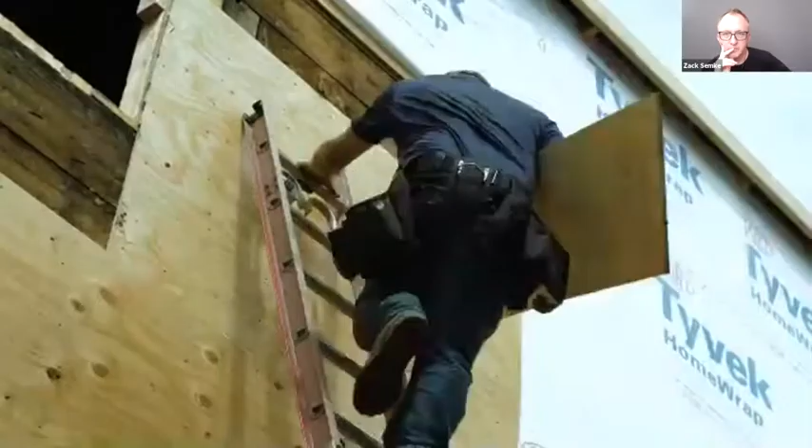HPZS is a woman-owned architecture firm in the city of Chicago that's focused on preserving a sustainable future through three things: historic preservation, sustainable design, and affordable housing. It's really at the nexus of these three things that placed us in a very unique space to meet the challenges of a project like this. The Yannell Passive House is on track to become the first renovated PHIUS project in the state. It's not just a new construction house. It's a house that was there when the community started, but today it's being built for the future. For us, a project like this makes perfect sense. Let's take an existing building and let's retool it for the future.

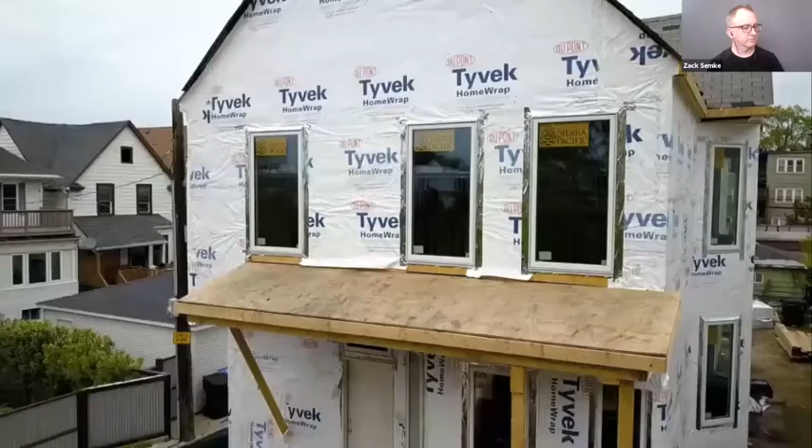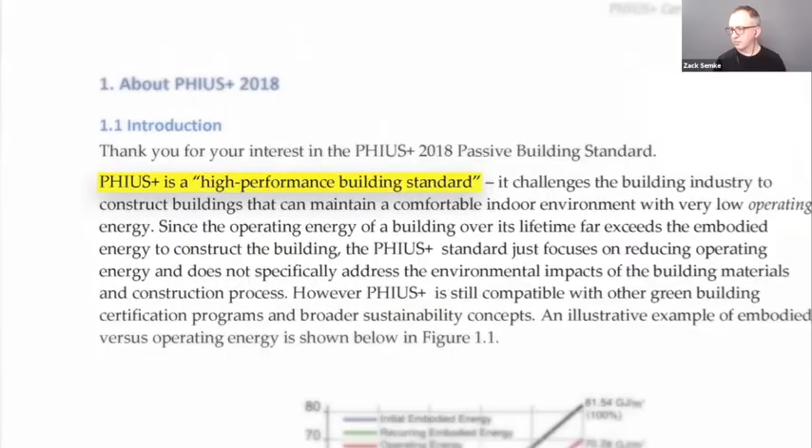What's different about the Yannell house is that it's pursuing the Passive House certification. A passive house is a highly insulated and airtight building. There are lots of homes that have some green or sustainable features, but this home has an entire suite of those features that makes it meet the very rigorous criteria associated with PHIUS certification. PHIUS has a strict set of requirements that need to be met not only during the design process, but also tracked through the construction process, tested and verified to an extreme precision.

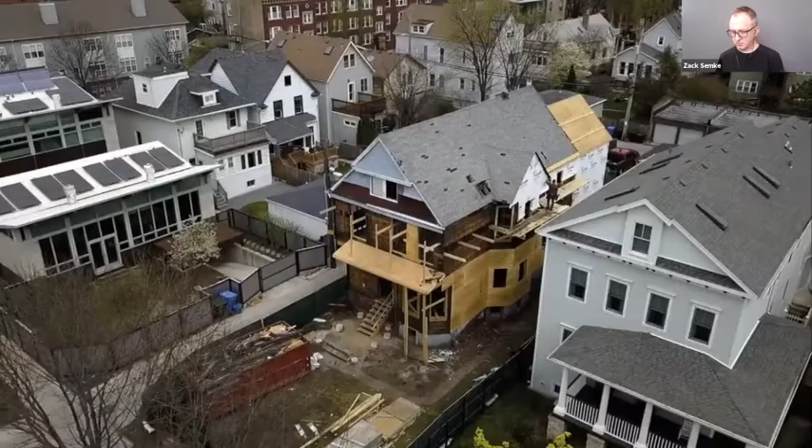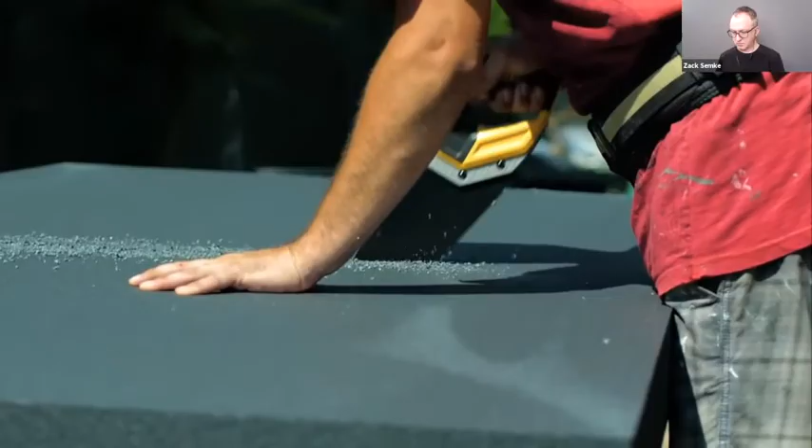The main design challenge was determining how to create a high-performance building while maintaining the existing structure of the house. When you're dealing with an existing house, you have set conditions that you can't change like you would in new construction. This was ultimately solved by overlapping certain areas of the house in insulation and by utilizing a new technology called AeroBarrier to help seal the entire house.

Yannell is efficient because it prioritizes the envelope of the building above everything else. This helps the house retain heat in the winter while keeping it cool in the summer. Additionally, with the Yannell house, the mechanical systems were specifically selected for high performance. So when the house does need to use active heating and cooling, it's doing so in the most energy efficient way. And the electric use of the house is offset by the introduction of solar panels on the roof.

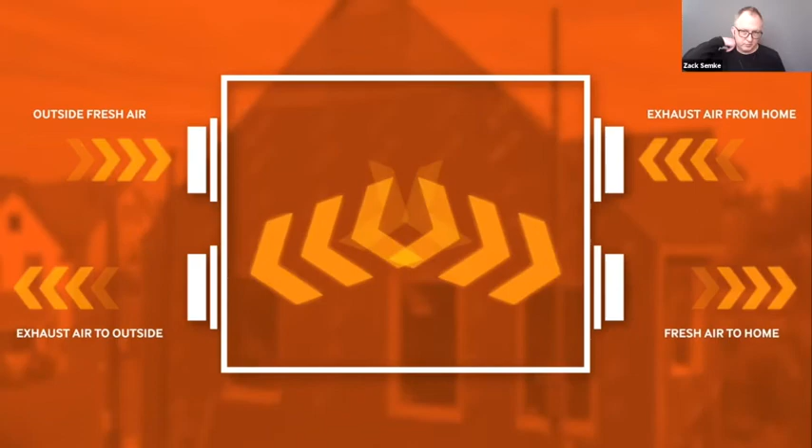In addition to heating and cooling, Yannell uses an ERV that brings in fresh outdoor air while continuously exhausting stale, stagnant air from inside. This creates the most healthy indoor environment possible.

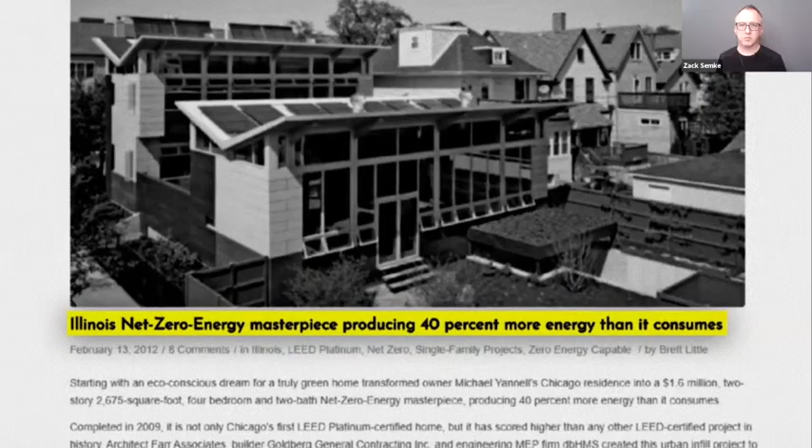A really important thing about this project is that it's a passion project of the owner. I've always wanted to push boundaries with green buildings. My home, which is right across the alley, is a LEED Platinum Net Zero Energy home, and I wanted to try a different route with this house, and the Passive House certification seemed to make sense with some of the things that I had learned from the 10 years that I've lived in my house, so it was a perfect fit.

This project is the first of its kind in Chicago because it's the only development-driven PHIUS renovation that's intended to be sold in the open market. Buyers don't have to compromise. This property offers the highest levels of luxury and comfort without needing to sacrifice anything for the sustainability that it offers as well. It has everything. It's designed with style, efficiency, and performance in mind.

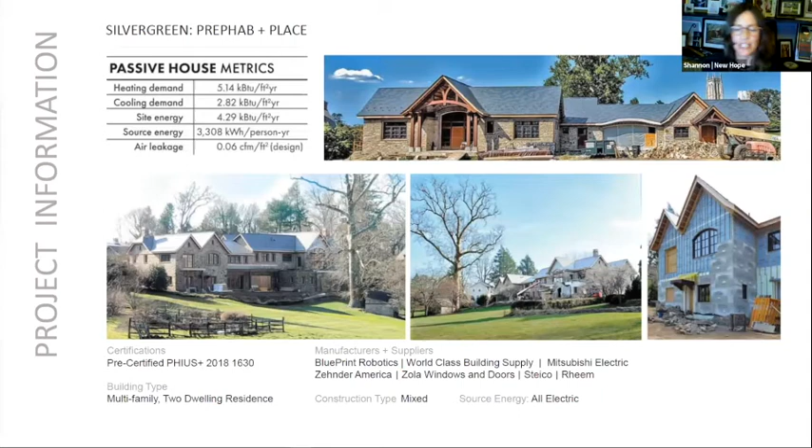So Silver Green is an all-electric, carbon smart, vapor open, custom site built and prefabricated PHIUS+ 2018 pre-certified multifamily passive house. It's a mouthful. And it's made with predominantly natural materials. It's in a town called Bryn Athyn, PA, outside of Philadelphia, between Philly and Trenton. And we set our priorities for two sustainable homes to rent affordably to families now and renovate easily in 20 years for aging in place.

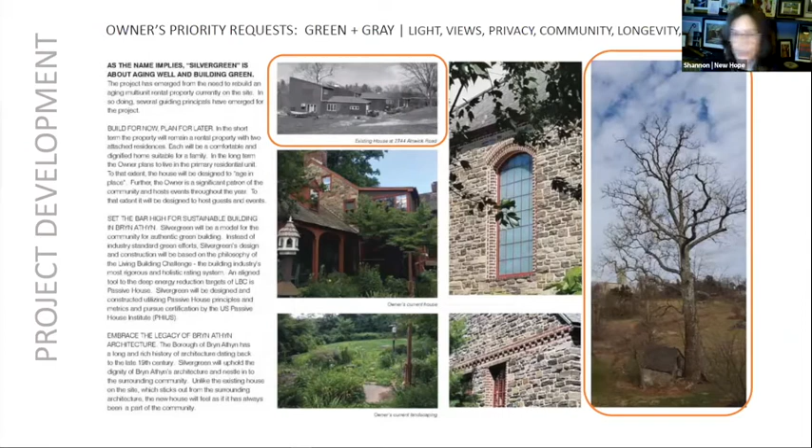So the architecture needs to fit in with the community and the historic district and have a big space for family gatherings, future accessible space for community events and fundraisers. And I advanced a little too quickly. Up there in the orange box is what we inherited. It's the existing building that was on site, a sentimental rental, formerly known as the Bishop King House. And on the right in orange is our oldest living residence, the natural spring, the spring house, the wetland, and a 300-year-old buttonwood tree, including the view, which is spectacular.

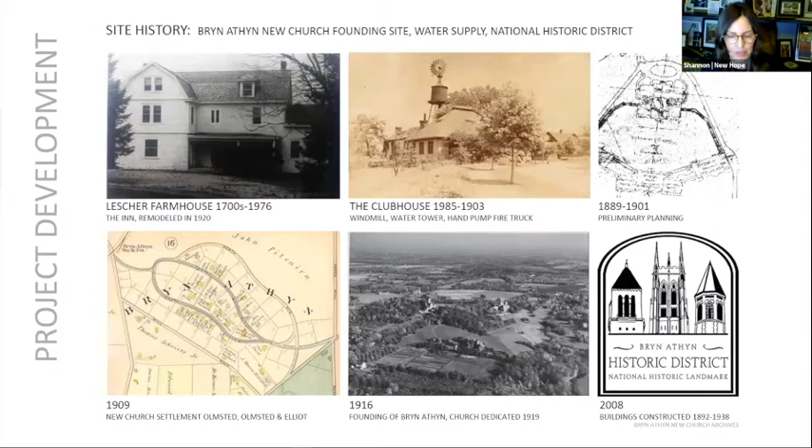And the history of the site where Bryn Athyn was founded is where our site is located. And so we also inherited four foundation stones from the windmill that you see in the top center that fueled the original water supply. And we are at the top of our watershed. So the first thing we did, step two, after we dug the history and got set up with the team, is we compared green building ratings and we selected passive house certification as our goal and living building as our guide, because we wanted to get the metrics right and have the most efficient, easily buildable, code compliant certification. And we also wanted to have natural materials, equity, and a lot of site features that passive house is still ramping up and getting into their certification.

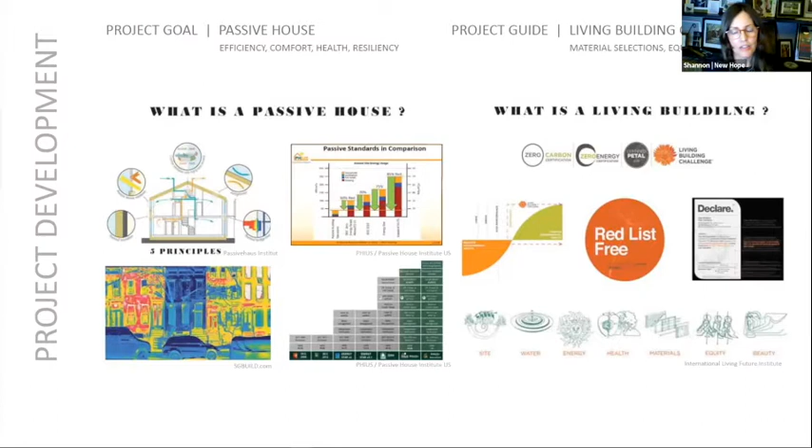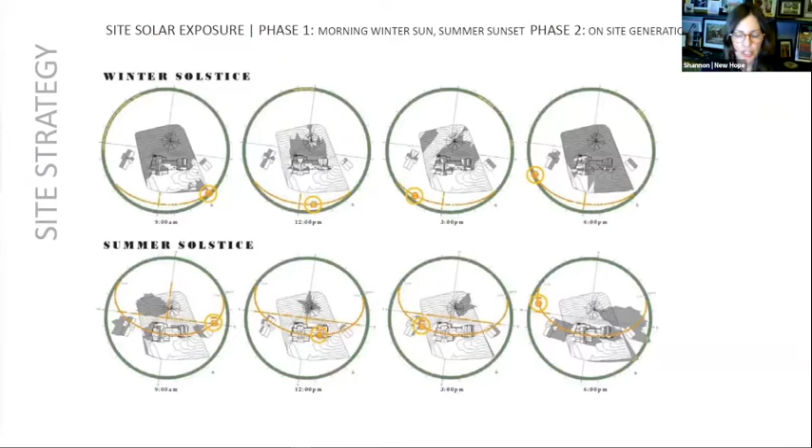So we drew up a series of legacy planning strategies for the site based on the owner's priorities and designed for all seasons to get winter and summer sun and future power generation on site. And we also designed for all phases of construction and infiltration of the water. This is a Think Green landscaping drawing, which is just brilliant and incorporates the windmill foundation stones into the landscape architecture.

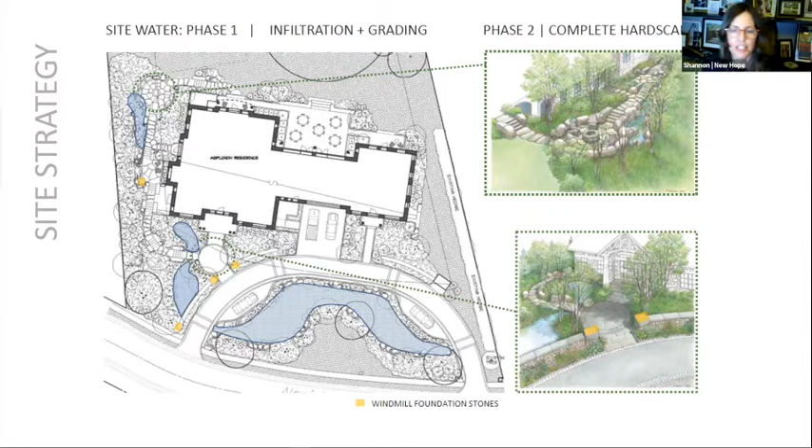And our goal was to really secure the exterior character for the building, so that would never have to be changed and that it would be classic and fit in. And the passive house envelope with the future renovations included, so we don't have to pull that apart later either. So we had to create our airtight, super insulated, thermal bridge free floor, roof, and wall assemblies. And then we had to test them for accuracy.

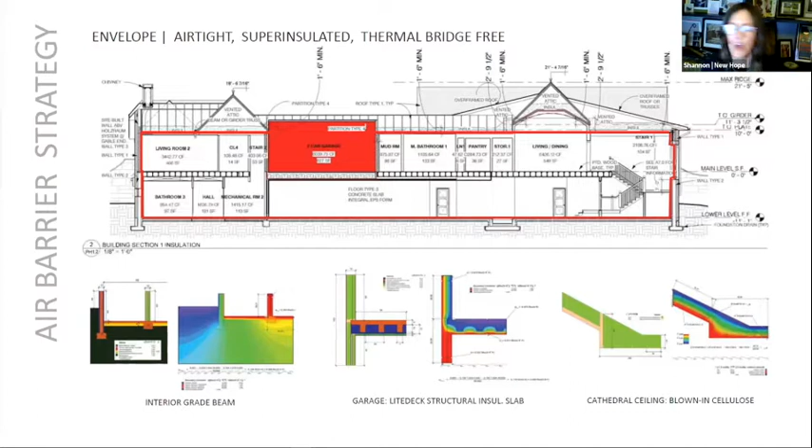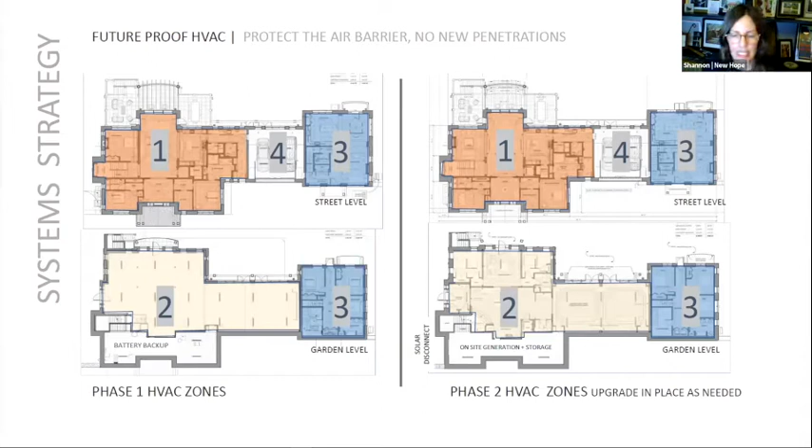So we also anticipated the HVAC and energy upgrades, since those things can change or be replaced within a couple decades. And we aimed to make sure that nobody had to poke any new holes when they went to replace things. And that's pretty much our strategy. So let's look at what we would repeat and what we might improve. So for our systems in the main house, I wouldn't really change a thing. We have a Mitsubishi heat pump, one upstairs, one downstairs, street level and garden level, and a Zehnder ERV.

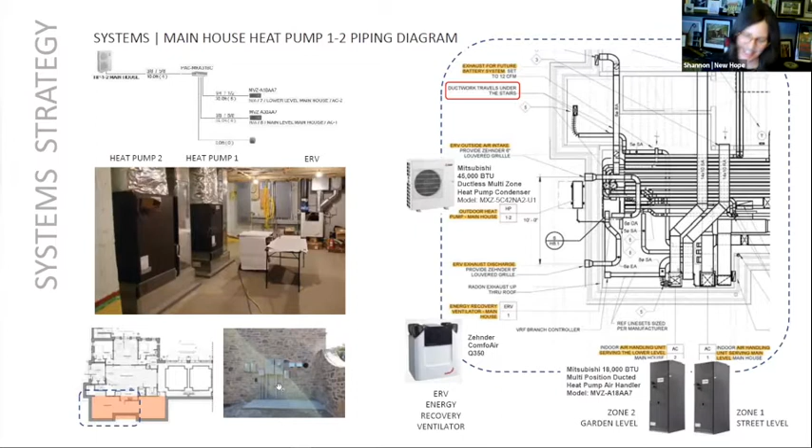And when my best friend toured this with me, she looked at this little piece of equipment that's going to go right out here outside, and she said, "That's it for that big house?" And I said, "Well, that's just one side. The other side has one too. There's 2 of them." She was impressed. And for the carriage house, we just have a similar setup, a heat pump, a Zehnder, and then we have a cassette in the garage to make it kind of a semi-conditioned space.

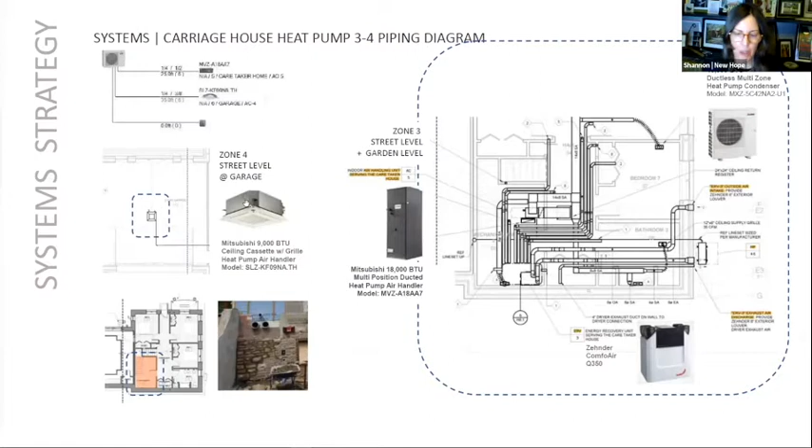And then for our electric, we're set up with heat pump water heaters, which are super efficient. If you haven't seen those, you want to see those. We also did do the heat pump dryers. We swapped out some of our specs for those. And we have plans for a future solar tile roof. We already have the car chargers installed. We're going to have the solar disconnect right here where the electric comes in, and room for a future battery. And I think we're going to put a battery in now just for little loads.

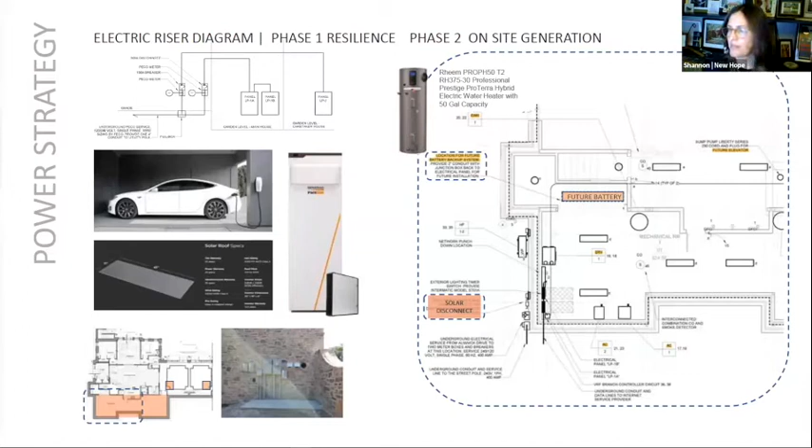So this is the exterior envelope. And this is what I really want to talk about, because we had to do the blower door 3 times to pass. So what would we repeat and what would we improve on our envelope strategy to be more airtight? At our basement, we've got these wonderful ICFs from Nudura. They're flat pack and then expandable and fillable with concrete. I would use those again.

We had a happy accident where we put an insert in by mistake because it was ordered. So we used it and it allowed us to take the insulation out of our service cavity, which was awesome for future renovations, right? So that's in the drawing, but then we didn't have to put it in because we remodeled it when we got those inserts and it worked out.

I love our detail for the real stone, which was a real tough thing to do because unlike brick, it's not really even along there where you want your weep holes to come out at the base. And we also allowed the mason to use this cement board and put our rain screen and our air barrier behind that. And then we had prefabricated floor separation between the rooms on the lower level. And then we had prefabricated floor decks come in and we wrapped those with our air barrier.

And then here's our Holzraum wall coming in via crane and being positioned nicely on top of that floor. And then the roof trusses came in. Those were all fantastic. I would do Holzraum again because they were my favorite part. They were carbon smart, vapor open, and they had those pre-installed windows. So we only had to install the windows in the basement and the big door assemblies on the first floor. And those were perfect. So the builder, even not being a passive house guy, did a great job there.

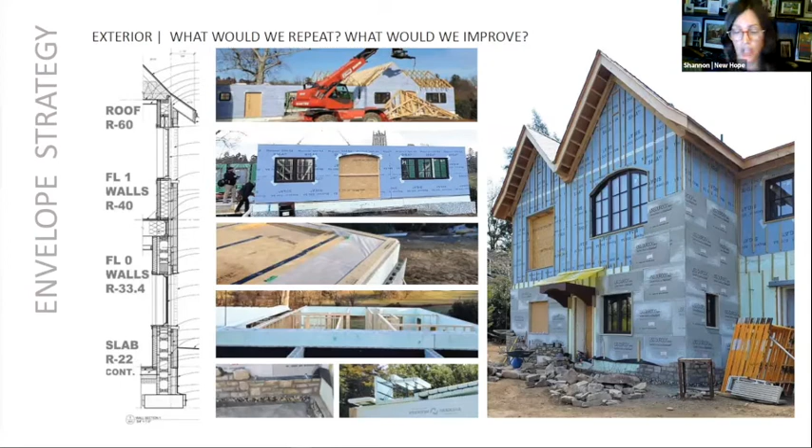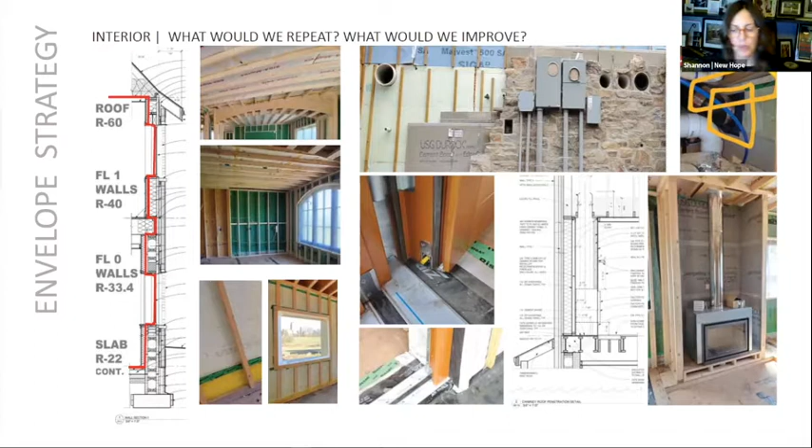On the interior, I still like the Nudura on the interior, but because it's got a little bit of a rib on it, we had to put a liquid air barrier onto the little yellow area down here where our air barrier climbs up. We had tape on it, and those little ridges, there's a little bit of air coming through there, which Angela will show you when she talks about testing and verifying in blower door tests.

And let's see, what else? Oh yeah, at the ceiling. I love the Siga, and we did blown-in cellulose at the ceiling, but I would do plywood next time just because we had some sequencing issues and we had some holes that we had to chase. We were chasing leaks for a little while there.

And I'd probably do a little bit more research on the door thresholds because we had some ADA door thresholds so that we could be accessible and age in place in the future. And some of that was a perfect install, and some of it was just like a part was broken, so we had to replace a part. But yeah, the Zola windows and doors are operating nicely and giving us the mullions and muntins we want and simulated divided lights we want, which are tough to energy model for.

Something I'd do different, I'd definitely do a penetration schedule next time. This got missed, and there it is hidden under the stair after a number of operations happened inside, and we had to chase that leak too.

And then we also did fireplaces, wood burning fireplaces with direct air intakes. And I would definitely do that again, but I would coordinate with the subs sooner because we had to change the unit that we wanted to get because he couldn't get it. And we also had to change some of our details because he wanted them to change. So if we had met with him earlier, those would have been in the original set, but it didn't change too much.

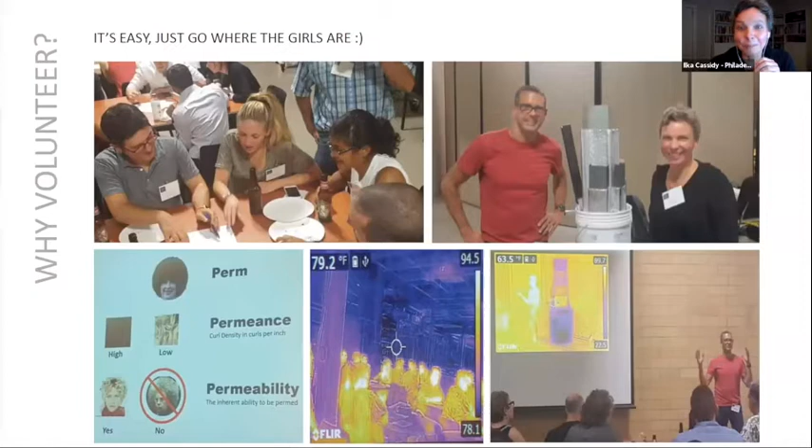I'm also very happy to be here, and I am representing Holzraum System, and my partners Steve Hessler and David Hessler are here too, and I'm sure they will chime in later on as well. So yeah, I'm going to talk about the coordination that it takes to design a passive house kit, pretty much for a complicated custom home like this, and the opportunities that arise.

So first, I just want to look really quickly at the panel assembly. So as Shannon talked about, this project is not only going to be passive house certified, but also follows principles of Living Building Challenge and wants to be sustainable and resilient for the future. So this panel is a vapor open, airtight assembly, and it only uses wood-based components. And I am happy to talk about this specific layering maybe later on, and also why it makes sense to prefabricate this in this way of layering.

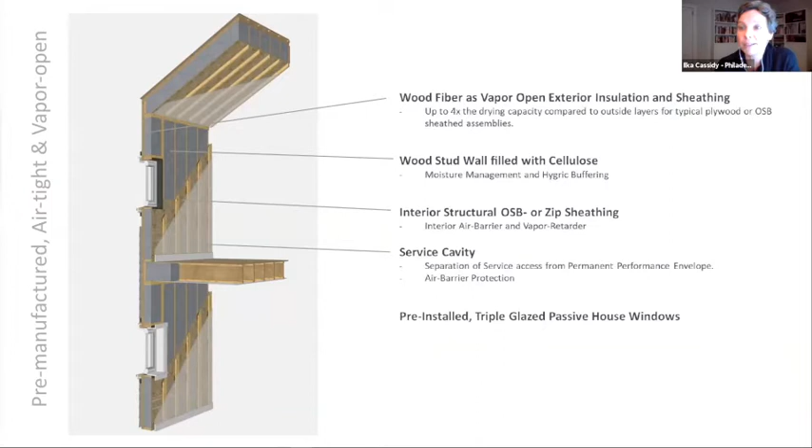So as Holzraum System, we are actually not panel manufacturers, but we work with manufacturers and take the role of coordinators and translators into what will be manufactured. So for this project, we worked with Blueprint Robotics in Baltimore. And Shannon, do you want to, yeah, thanks.

And in every case, as soon as prefabrication comes into play, every component has to be modeled. So a translation from design intent, in this case, we had a Revit model, into a parts-based model has to be done. So for us, that also means that there is a great potential in then using this parts-based model to coordinate with other perspectives. And we call that a SIM model, or a single integrated manufacturing model. Next slide.

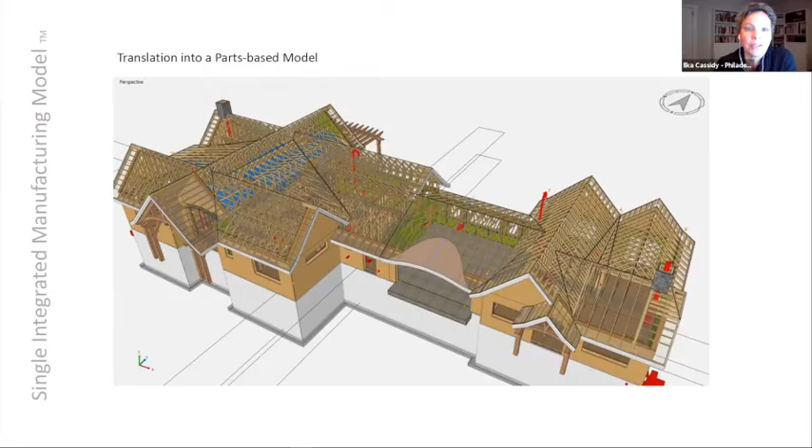So with a coordination model like that, we're able to do clash detection with MEP and coordination with concrete, steel, roof trusses, and other prefabricated components within this kind of single high fidelity model.

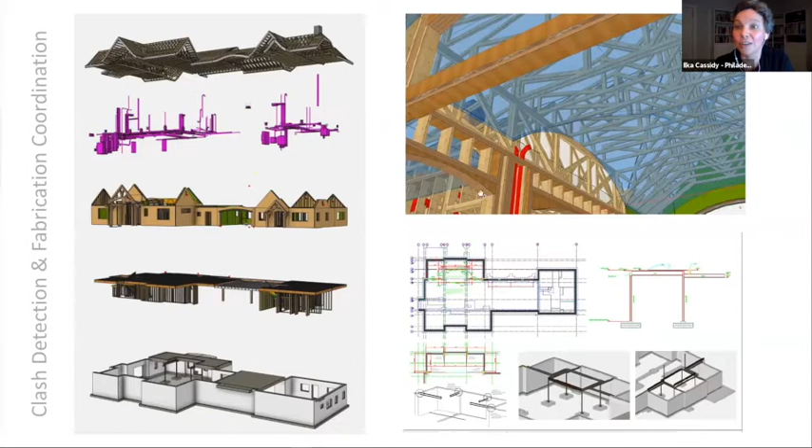And because we have all the exact locations and dimensions and parts, because we know that the robots at the end will build exactly what we drew, we can actually generate steel coordination drawings like the one on the bottom there. And we can also provide 3D drawings to other fabricators of parts that are off-site manufactured. So in this case, there was this pretty intensive groin vault that also needed to fit within the truss layout. And then the next slide, Shannon.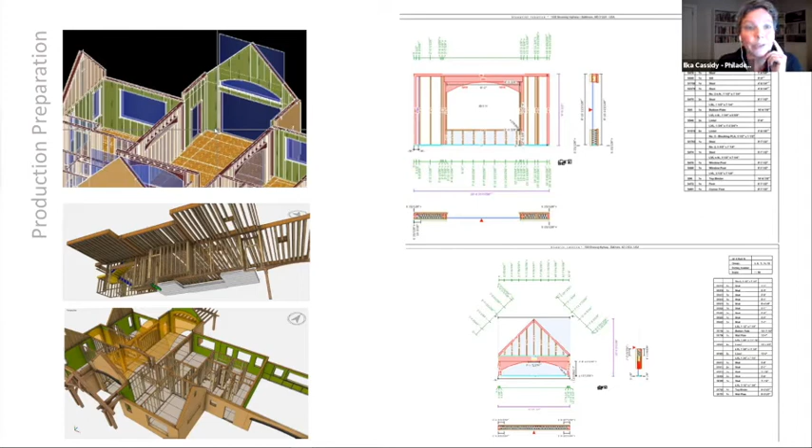Next slide. And here, this is at Blueprint Robotics, and you can kind of see those files in action on the bottom left, and then the machines just kind of fabricating rapidly, which is very impressive. And then to the right there, you can see these drawings that we generated out of that model as a reference for the panels.

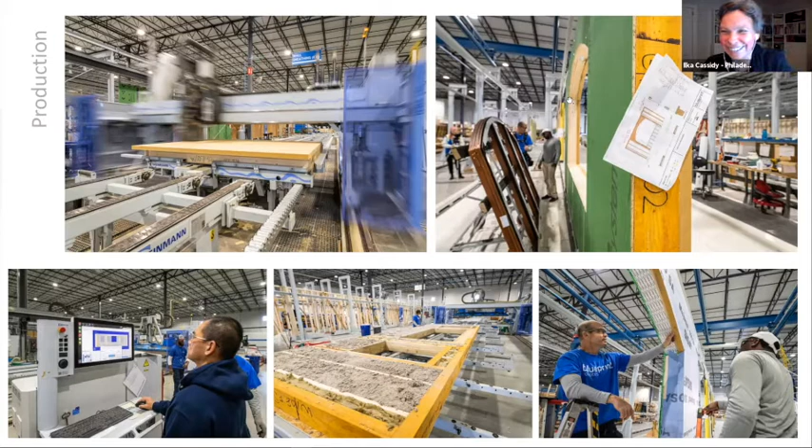And then some things still have to be done by hand. And this kind of arched window was definitely pretty nerve-wracking. And we were very, very happy when that all fit in perfectly.

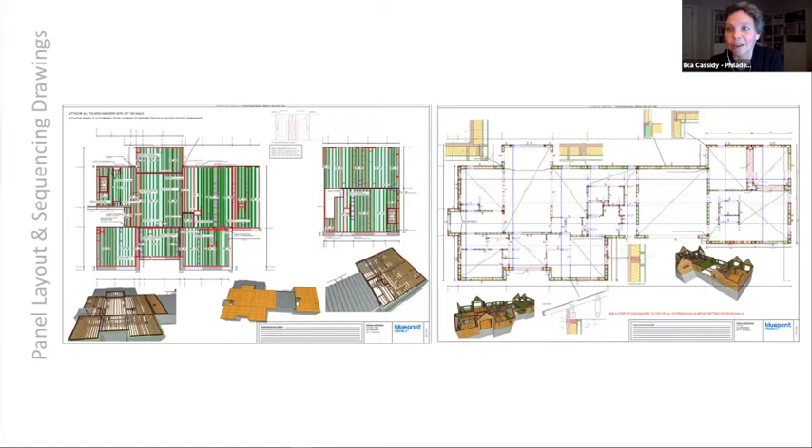Next slide. And then again, from the same kind of model, we actually created these panel layout drawings and installation instructions, which are for the installer on site. So in this case, the installer was actually independent from the manufacturer. And that's definitely something that we can talk about later on, because that definitely comes with benefits, but also with challenges. Next slide.

But it all worked out well. It all came together. Everything fit. The groin vault is on the bottom right there. That fit as well. And then also what's pretty good about this coordination piece is that you can really look at the sequencing, because in passive house sequencing is just so important, because, on the bottom there, the image.

So the membrane liners had to be placed before the trusses came in. And once the trusses are there and you missed that part, there's no way that you can go back and redo that. So yeah, but it all worked out. Next slide.

And this is also something really important to talk about, and happy to talk about that later on as well, which is the third-party review. Because as soon as you manufacture these closed panels, the project falls under the industrialized housing program here in Pennsylvania. And you have to fulfill a very rigorous third-party review process before and during production, and the factory also has to be certified.

So if you're trying to make this approach more accessible, especially for smaller manufacturers and smaller projects, that's kind of a substantial hurdle. And I think it would be great to really look at this. And talking about third-party review, that leads nicely to Angela, who is responsible for the PHIUS quality assurance.

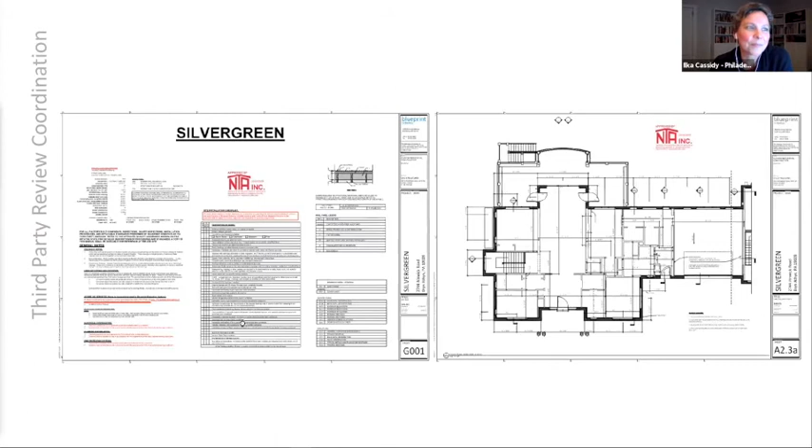Thank you, Ilka. Okay, so transitioning to the verification piece of the project. My name is Angela Iraldi. I am both a CPHC and a verifier with Revision Architecture here in Philadelphia. I'm also the co-chair of the Passive House community in this area, along with Paul Thompson, who's on the line. So if you are interested in getting involved, please let us know.

But like so many things in life, it would be fantastic if we had a book to tell us all we need to know about Passive House verification. But unfortunately, that doesn't exist. And no matter how much you plan, issues are still going to happen. But that's okay. It's usually nothing we can't clean up. And we just need to be resilient, like the projects that we are trying to build, right?

So in navigating this project, there have been a few unexpected things that came up, and I will walk through what those looked like. Next slide, Shannon. Okay, so first, it was most of the team's first time working on a PHIUS project. With any new project, there's a learning curve, and with PHIUS, there are some common oversights with respect to process milestones and requirements.

Luckily, we were involved early in the project to review all of the requirements and expectations. And although there were a few items where the team was like, oh, I had no idea that was a thing, we were able to get them resolved early on so they didn't become larger issues down the road. But I can't stress enough that if it is your first time working on a PHIUS project, please have an early review with your rater.

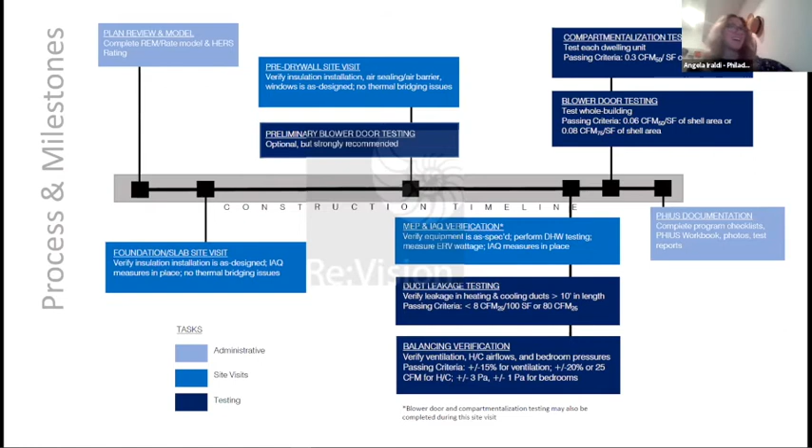Next slide. Secondly, as with lots of projects, field changes happen, but it is the job of the rater to verify what is installed is per the design. For example, one of the first things we observed on this project was we had at our subslab inspection 6 inches of subslab insulation installed, but the drawings called for 4 inches. So in coordinating with the team, it was confirmed that there was a design change and the installed condition was supposed to be 6 inches, but we needed to also verify that the WUFI model accounted for this change.

And in our case, the model wasn't really affected with 4 inches versus 6 inches. But if you're working on a larger multifamily project, for example, 2 inches of extra insulation could really mess with your cooling loads. So it is something to be aware of. Next slide.

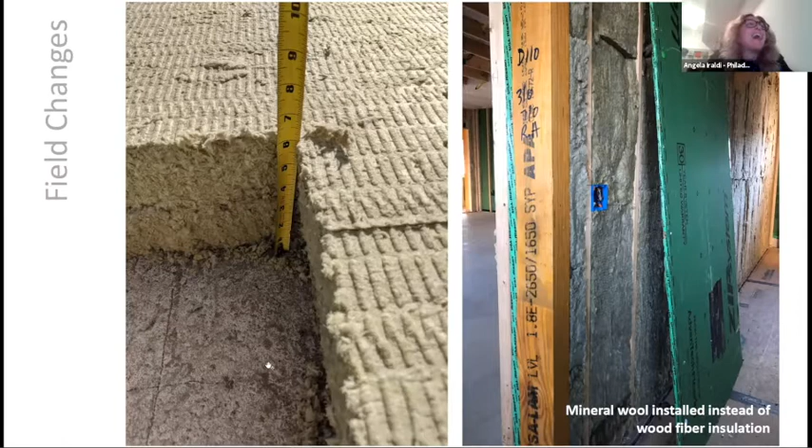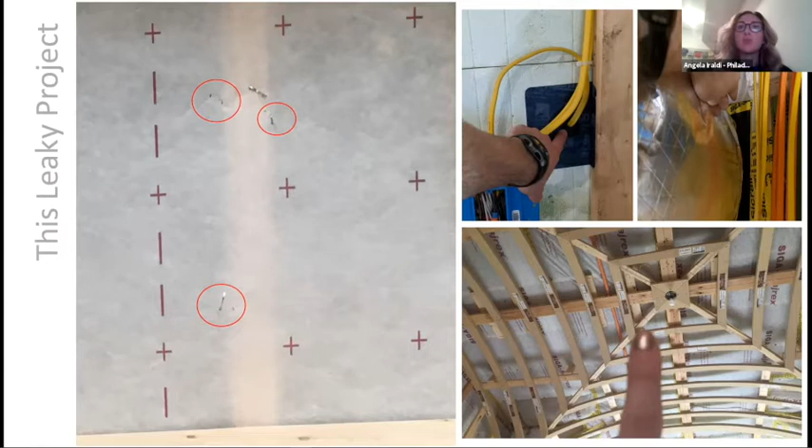The other thing I want to note here is that while it's obviously important to find all of the potential air leakage issues, it's also important to try to preclude issues as much as possible. So above this air barrier, we were installing loose fill insulation. And that lower right-hand photo shows this, but SIGA actually recommends installing battens to support the load of the insulation so that the air barrier doesn't pull away from the structure and completely lose its function. So that was something that we noted as missing in this vaulted area of the project, and the battens were subsequently installed. So with all these issues found and our initial test results in, we failed. Next slide, Shannon.

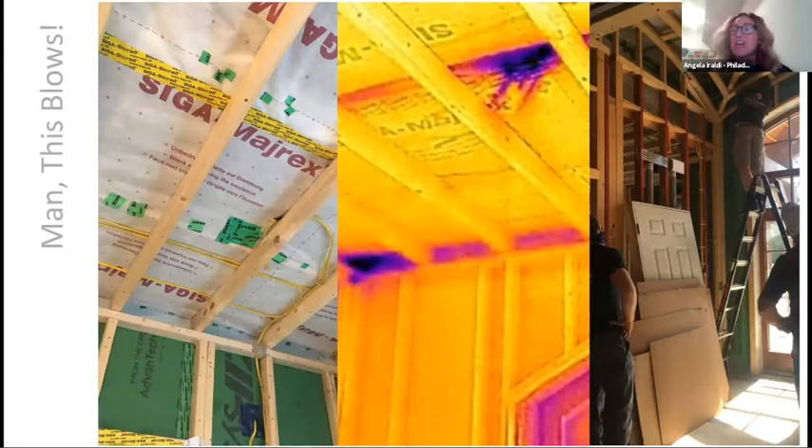But that's okay, because we kept going and we kept trying. We went back and taped over all of the staple holes throughout our air barrier. We did IR scans to identify leakage points, especially in areas we couldn't directly access, right? And we involved the team. I mean, when you're dealing with passive house airflows, leak chasing can become this brain teaser of a treasure hunt, right? It could be so difficult, but it's so satisfying when you do find these issues. So second time around, we patched up as much as we could, and we failed again.

Next slide, but that's okay because we tried again. So the third time around, we're really looking at some of the smaller details, right? Like what is left for us to get. So we went back with more tape on our ceiling air barrier. We also applied a liquid mastic over the tape adhering the subslab vapor barrier to the ICFs on the lower level, as Shannon mentioned earlier, because those ICFs actually have these tiny little ribs that are like pathways for small amounts of air to get through. So we sealed all that up. And the third time's the charm, I guess, because we finally passed our test with those things. And I will say it's nice that it took us a few tries, because it would have been super boring and uninformative if we passed the first time.

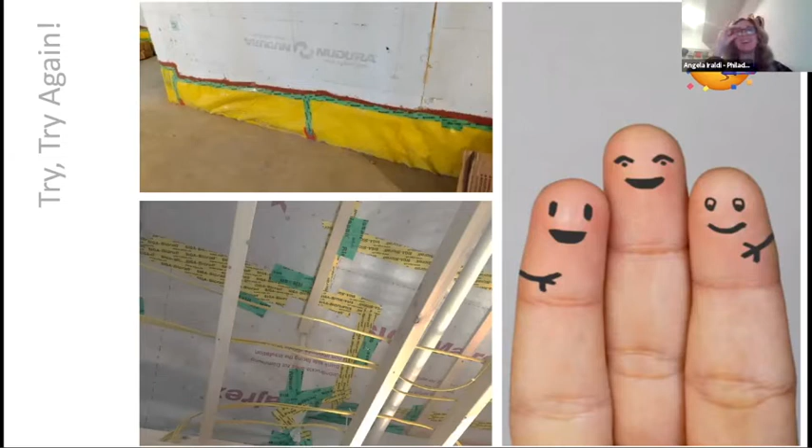So last slide, Shannon. So at this point, we feel like we are really set up for success for our final testing and inspections. And we are excited to deliver, hopefully, a very successful project come this summer. So thanks everyone for joining and listening to our presentation. And I think I'll throw it back to the Passive House Accelerator folks.